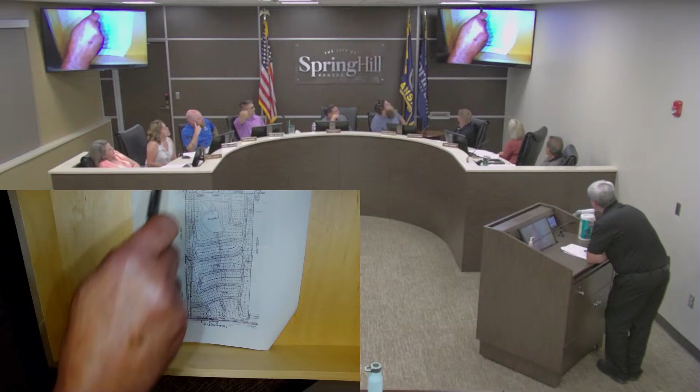Okay, so - right here, can you see this? This is the main entrance into Brookwood Farms. And this turns, and this is gonna be a connecting link over and up where these would tie in, and this will tie in eventually to Ridgeview and then 207th. And if you've ever driven out of Brookwood Farms, it's kind of funny looking actually - it just kind of folds off into the field and stops.

So we believe, staff believes that there's no harm to this, no harm to any adjacent ownerships. The property to the east will be on the corner of 207th and Ridgeview. We're working with a preliminary plat right now that will tie Mr. Krause's property into 207th, where he'll have an entrance on 207th, and also into Ridgeview, possibly running some of the traffic eventually, as it develops, through that link right there.

But in looking at it with three entrances into that property, and there's only one entrance into Brookwood Farms - if someone were to start developing his property right away up against Brookwood Farms, the next thing staff would hear is, well, you won't let me develop my property because there's only one entrance into Brookwood Farms. I mean, we've pushed it now as it is. But that's what they did back in the day when they were approving things.

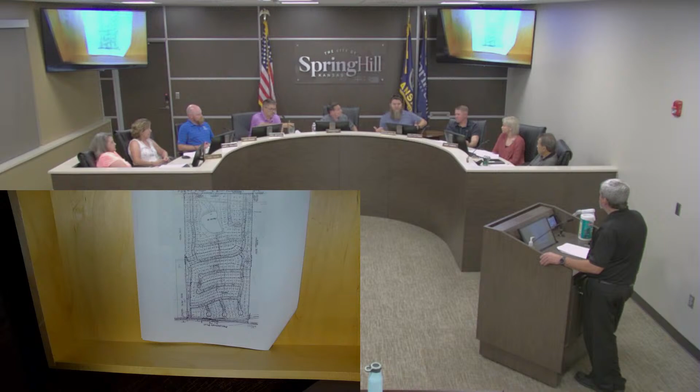And I know we all discussed this before, and I'm not gonna speak for anybody, but this was definitely the middle road for the developer and for what was around the property. Right, and I think everyone's doing a better job of total planning to the extent that we can, and just the simple fact of two entrances in.

And we're doing that cutoff. If you remember Dayton Creek, we cut them off from building permits until they built that bridge and had a second entrance also. If you remember, they just had a stub-out street there to Lone Elm. To be honest, I was trying to figure out how I made that calculation last time, and I did find it was with the fire department. So we shut them off, and they were shut off for six or seven months, four months anyway.

I have concerns over the comment, and this is crystal ball, but I have concerns over the comment you made that the proposed property would not develop down to 207th. Mr. Krause's property, if and when that ever developed - it will, I'm just saying - okay, if and when that ever developed, in your head you don't think that would connect initially down to 207th, from conversations.

I kind of have a problem with that, and that's something we'll look at if we get a true preliminary plat in, with phasing. But I'm just saying, I have a problem with that, going back to what Roger's saying.

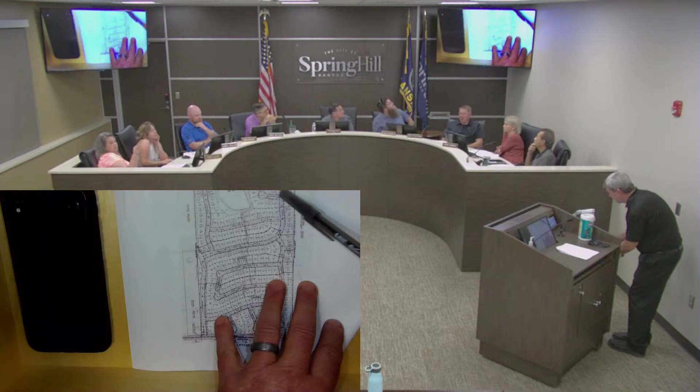But no, there was connections to it. I understand that there was one. Well, there was another one too. Oh, there already was, up here? Okay, I misunderstood, that's what he was saying then. Pat, can you explain the subdivision that was there? Is that right? I misunderstood what you said, I thought you said there was only one.

No, there's 2 connections shown, but this one here will be put in with this phase, and it's already planned to be connected with the next phase of Woodland Crossings, is what I'm getting at. It's an immediate connection. Okay, that's what I was getting at.

I think the applicant wants to speak a little. Yeah, you can come up and speak. Thanks, so it's Matt Slish, 50 South Engineering Solutions, 50 Southeast 30th Street, Lee's Summit, Missouri.

So we have been the engineer on this phase, or this development, since phase 3. So we've done the plats, everything. Phelps did the original preliminary plat, then they did the first phase, and we've been taking care of this design since. Originally, when this began - how long has that been? Oh man, 6, 7 years? That's kind of what I wanted to read, I don't know if that helps or not.

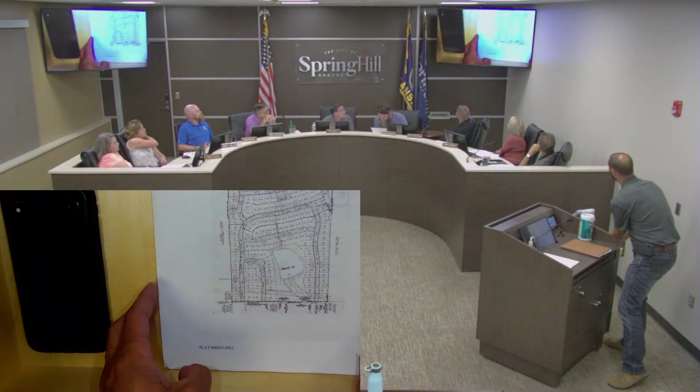It's confusing to me being upside down on that thing, but let me see if we can take it out here a little bit. So with north being the upper part, the top of the page here - we do have Skyline that made its main connection that came off and went to the east. That's always been there, that's the main thoroughfare that will eventually connect the properties to the east and eventually down to the south at 207.

There were always two accesses to the west that went to the development ground some other developer is doing, where we have no part of or any piece of it. We did have 3 connection points that were down to the south to Mr. Krause's property. The one we brought in on the last phase and had the discussion was this southeast one.

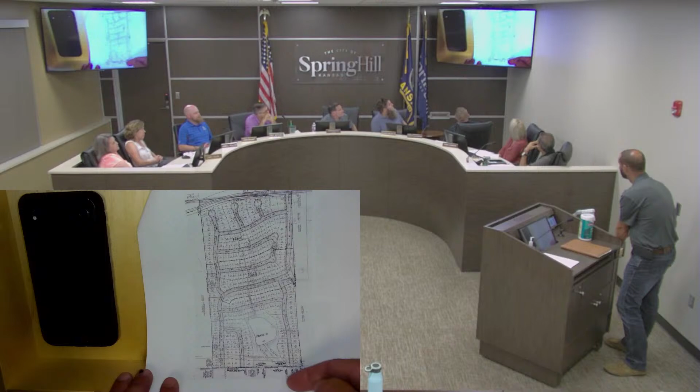We converted that into a cul-de-sac because, as you got out there, I think it was a poor choice at the preliminary plat to show that connection point. If you go out there and see it, there is a creek line that runs down through here. The grade change from here to here is over 20 feet. And then once you get onto Mr. Krause's property, the northeast portion of his property is not developable, not something someone could utilize.

So in the 6th phase, we came in and said, can we cul-de-sac that piece, because that made sense for everybody involved. No one down here is ever going to spend the money to build that bridge. There's no reason for us to extend the road down to that point. We can cul-de-sac it and have a very manageable road section.

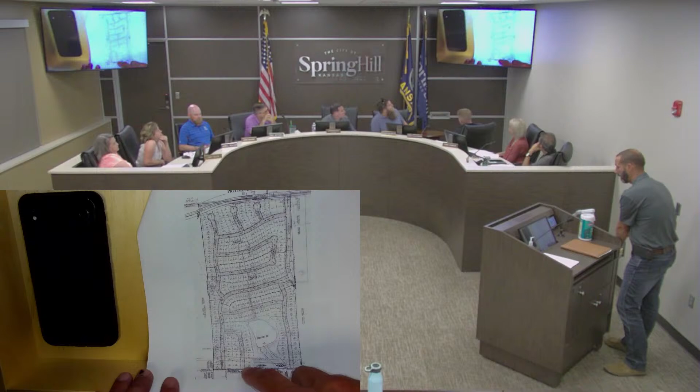When we came in to do the 7th plat, we do show a cul-de-sac on this corner. However, the cul-de-sac is not a permanent cul-de-sac - the cul-de-sac feature itself will stay forever, the bulb and pieces of it, but if you notice right down here, we left 50 feet of right-of-way, so that when Mr. Krause does develop, he can connect to that cul-de-sac bulb.

He can also still connect to the south or to the west side of the other road, so he still has two connection points from our property onto his property. It's just our belief and discussion that the northeast connection wasn't good for us. It wasn't going to be good for him in any development piece of it either.

From our perspective, the only reason this cul-de-sac is here is for this interim period, when we hope Mr. Krause's property sells and develops quickly. But if it doesn't, we have a turnaround for emergency vehicles to come down this rather long dead-end road, to turn around and get back out. But again, there's a connection point right here where they can simply connect right through, public access, and they'll build a road in.

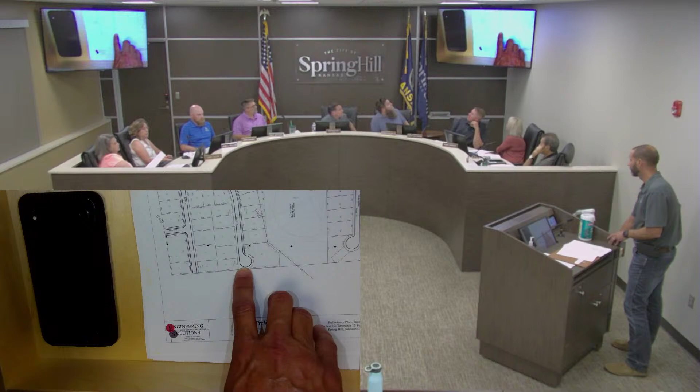Down the road it'll obviously appear a little odd because you'll have a cul-de-sac somewhat on a thoroughfare street. It could come out, but in reality it's just this interim period when you have to have something for emergency vehicles right now to serve and satisfy that piece. I don't mean thoroughfare, but a through street. There's a through street.

Mr. Krause did make some comments about 911 and emergency vehicles. Like I say, our belief is that we still have two connection points. That cul-de-sac, we're not hindering anybody on the emergency vehicle side of it. Your fire department, your emergency staff has looked at this and is acceptable to it. Your third-party review staff has looked at it and is also acceptable to it, so we think it's a fine piece.

So essentially this is just kind of the last phase of Brookwood, and we were trying to figure out a good way to terminate it so that future development can still occur, but also so this development can end at that south line and be a through piece. Hopefully that helps clean up some of those things.

Could you elaborate on the stormwater runoff from the detention cell in phase 3? I'm guessing, does that drain into a lower area into the northeast corner of Mr. Krause's land, so it makes it undevelopable? Is that what we're going towards?

Yeah, so the pond's been there forever, and it always had a drainage way that went through Mr. Krause's property in that northeast corner. So it'd be highly unlikely you'd develop that anyway, but it wasn't related to what we did with the pond or the detention side of it. It was just that the natural waterway went through there.

My point about it being undevelopable, or rather expensive to develop, is just that the terrain down in there changes a lot, with contour elevation change from our southeast, around where our cul-de-sac is, down to that property line. And then through there, there's a rather large draw that goes through. So it's undevelopable because you'd have to, A, manage the stormwater, and B, build up a grade enough to make something work in there, and in a residential development area it would never pan out.

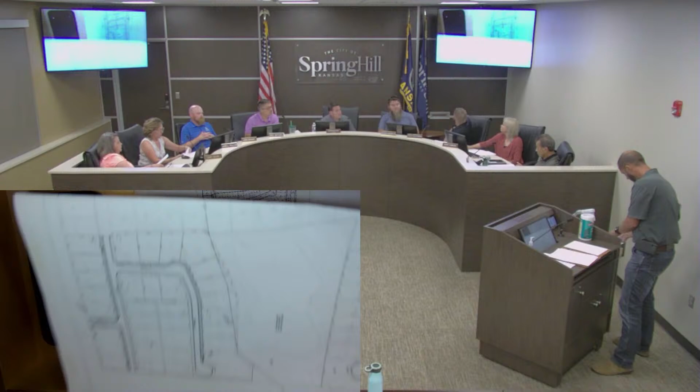Southeast one, yeah. So on this one here, what is that? It was just an easement that we had coming across. So we have a number of utilities from sanitary sewer and stormwater that run back that direction. I didn't bring that stormwater plan set with me, but there's just utilities running down through there. So everything on this south end became or will become common ground. So in order to give the city a public easement for it, we just had an easement that we dedicated on that piece.

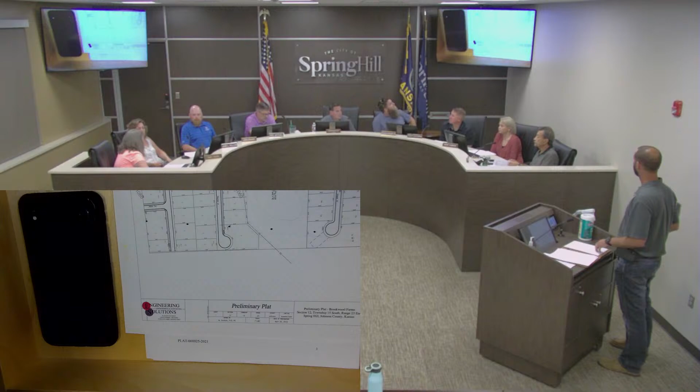All right, very good. We may have more questions. I'm gonna let Mr. Burton finish. Sure, absolutely, thank you.

So I do want to make a couple of things clear on when he's talking about a temporary cul-de-sac. It is set up and we will look at that and whether we will allow a connection to that or not. Because the last thing, and something we're looking at, and I went to some schools, so now I'm really smart, is traffic patterns through here.

And this part here, the city may not want that traffic pattern. And that was one of the ideas when I was just talking to the engineer about this, it's been a month ago. In cul-de-sacing that and keeping some right-of-way distance there, it doesn't prohibit, but it most likely will not be a tie-in, unless it's something that just jogs over into a horseshoe or something where there won't be traffic just using it all the time.

Because this link here obviously is gonna be the big link. It's a straight through cut right there and then right here. So I just wanted to make that clear because, well, you can tie in, well, it might not be able to. It depends on what the city engineering and staff do the calculations on. So I think it's a better plan than it was. That's all I have, sir.

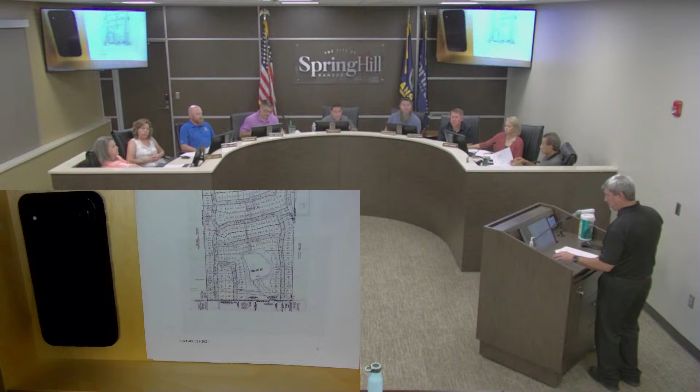I appreciate their concern. They seem to be making an awful lot of major economic decisions about what's gonna happen to my property without ever talking with me.

Much of the disparity in ground level is because they've made large fills on their property. I haven't gone down there. I don't know how much fill they put in, but they've hauled in an awful lot of dirt. I know that.

If they want to make that a cul-de-sac with access available down the road as they're proposing on that second street, where the public right-of-way is to the property line, and the street is made so we could come across there, then the developer of my property could make a decision with the city if that's what they want and if it makes economic sense.

I'm told that neighboring communities, neighboring cities, will not allow cul-de-sacs to be run into the adjacent properties. But that's something the city of Spring Hill has to decide with.

But I think that without talking with me, they've made an awful lot of decisions. My property was sewered, and I wrote a check up front for the sewers when they were put in. I have no special assessments on my property.

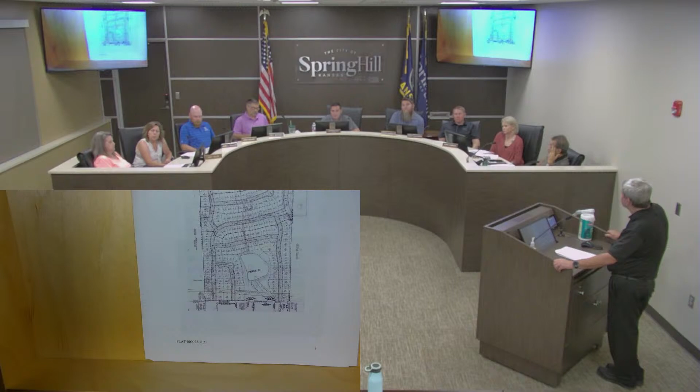I'm probably one of the few property owners out there that can make that statement. I've been a supporter of the city's development from day one, and I think I'm entitled to have reasonable access to this property to protect the economic value of my property. And I think what they're proposing here is depriving me of a very substantial property right, which the developer of my property—it will be developed. It's a question of who and when. It will be developed, there's no question about that.

Chris George is to the south of us. This subdivision is to the north of us. The city owns the parkland on the west side, the entire west boundary of my property, 26.5 acres. So it's not a question of if it's going to develop, it's a question of when and by whom.

And I think we ought to be entitled to be protected from being isolated from 199th Street. I would ask that you at least require this cul-de-sac be constructed in the same manner as the second street from the west, so that we could tie into it down the road if the developer of my property decides that's economically feasible and it's agreeable with the city of Spring Hill at that time.

There's right-of-way already there, as Matt said. You can look on the preliminary plat and there's right-of-way there. We're just forcing them to put a cul-de-sac in there. Whether we call it temporary or permanent, that decision will have to be made in conjunction with a developer that buys his property, the traffic study, the planning commission, everything. So it's not that they can't absolutely tie in there, but staff felt that it was best to say that this is a cul-de-sac. It may remain a cul-de-sac for another 30 years, we don't know. But there is city right-of-way at the bottom of that where improvements and tie-in could happen.

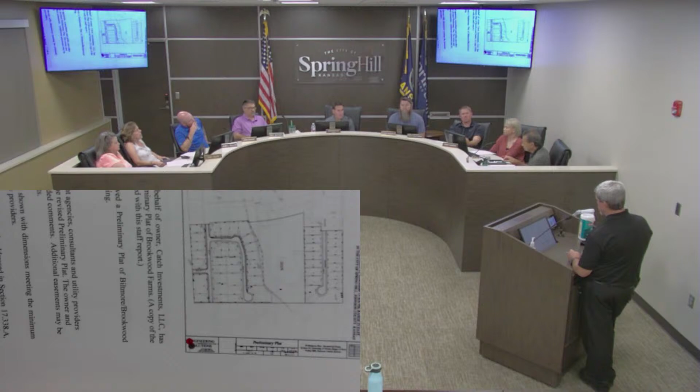All right, I think applicant's done, Mr. Burton's done, staff's done. We just, Mr. Kraus, if there's no further questions, do you have any other comments, Mr. Kraus?

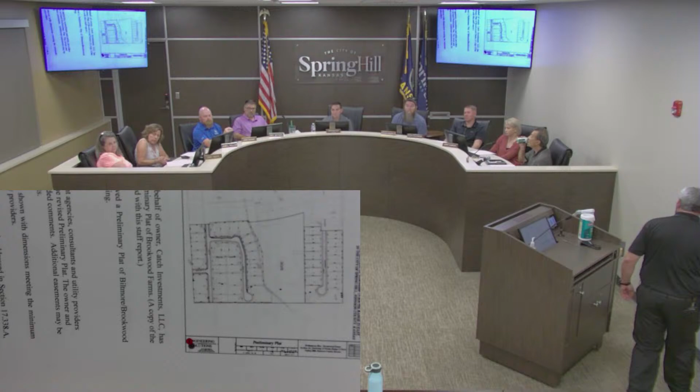I have not seen a plat where I can determine that there is in fact an easement there. I would like to see a plat in large enough scale that I can. Is that possible to give Mr. Kraus that, Mr. Burton?

Yeah, it shows it, front and back. And if you don't have it today, make sure he gets it. It's right here. Okay, we're going to the final plat next. You can see the modified design there.

As I read this, the cul-de-sac termination will actually reach my property line, is that correct? Right of way, you're looking at right of way, but yes, that is the right of way that terminates there. The asphalt won't come that far, but your right of way does.

This is right of way, and then in between there will be the street and cul-de-sac. So this is public dedicated right-of-way up to my property line? Yes, just like Matt said. Okay.

Okay, I think we're done deliberating here, so I think we're just looking for a motion at this point. Or do you have any other comments, Mr. Kraus? No, sir. Okay, thank you.

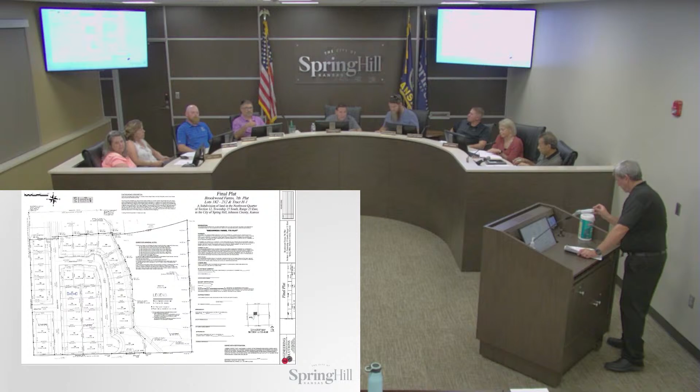The next item we have is reports, and I didn't get to review all that you sent out, Pat - 7 pages of stuff. Sure, the comprehensive plan scope. Right, so this is what I kept telling - I guess I can take it off. I kept telling everyone that I'd written it and then I'd forget to get it out, and I know people were like, yeah, sure you did.

But so I'd gone through this exercise here and with another jurisdiction, so I think I've covered everything. What I was trying to be real careful on is I left everything as would be - most everything as to be completed with us and a consultant. So as you read through there and you say, oh wait a minute, we were going to do that, it probably - so, but I wrote it as a consultant was going to help on everything. And that's why I wanted everyone to read through it, see if I missed much. I'm sure I missed something.

And then we can get going and we can get the RFP out on what we thought we would like to see. And it's an ever-changing atmosphere, or an ever-changing landscape here, quickly on development that's coming in, development that's trying to be proposed.